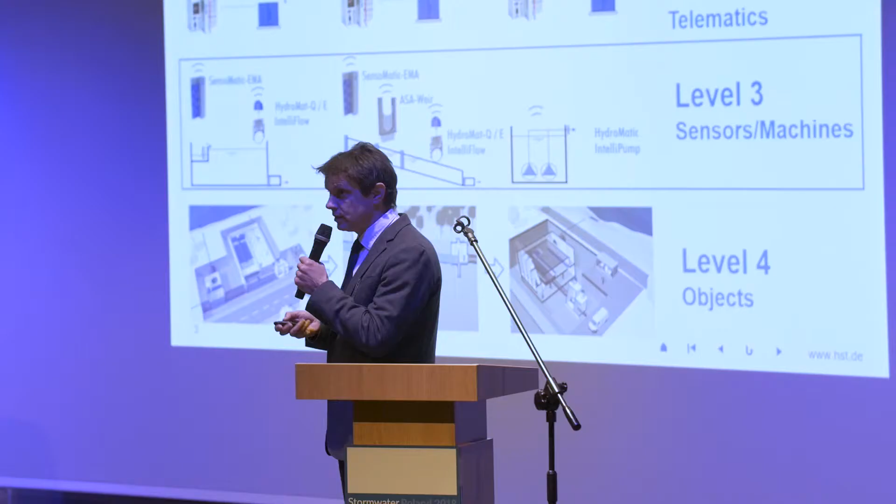The second level is then the local controls and the telematics that transfer the signals coming from these sensors to the higher level management platform, which is the highest level, and this is a combined platform consisting of a rainfall portal, SCADA process control system, operational system, and probably also a simulating software.

When looking at infrastructures, there is one major challenge, which are the peak loads. No infrastructure can be designed for the 100 years rain event or a 50 years rain event. It would be simply not economical. And this is valid for more or less all infrastructures, for traffic, for power, for water supply, and first and foremost also for drainage systems.

So that means the solution is to create storage to accept and to take the peaks, but not only to create the storage, but also to manage the storage in the proper and in the best possible and effective way.

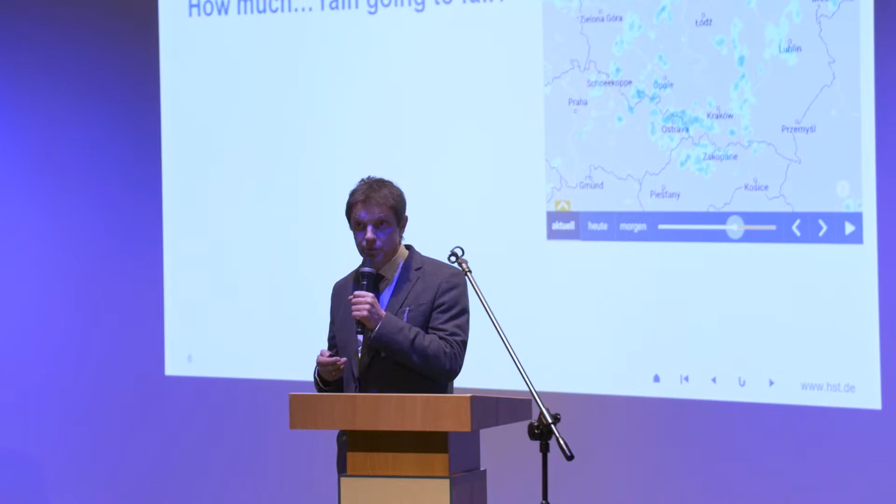Another major incoming system parameter is the precipitation. To know where, when, and how much rain is going to fall is very, very crucial information that can be and has to be used to manage and to organize a system. Therefore, our company developed a precipitation platform.

We call it NiRA.web. Actually, this is a radar-based, high-resolution, precise forecast, also using historical data. It has a resolution of about 1 square kilometer and is updated in a sequence of 10 minutes. So it's a quite precise rainfall forecast. And it is permanently calibrated through ground stations to compare and get the most precise results.

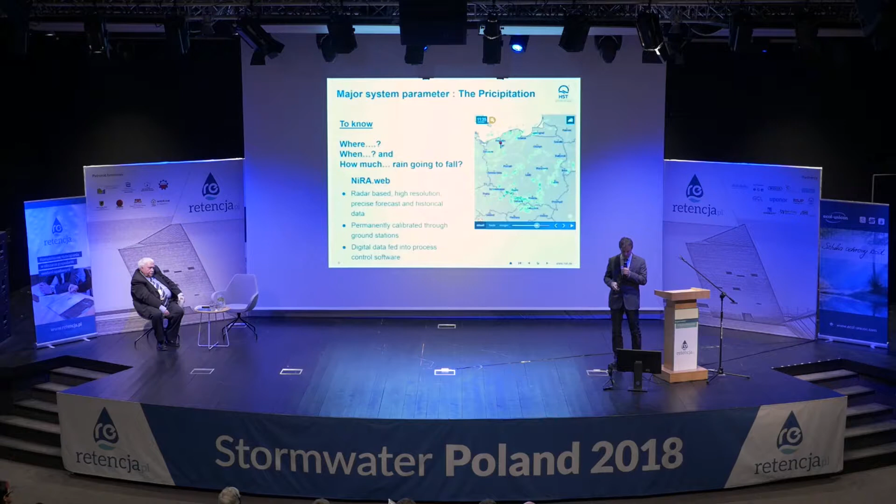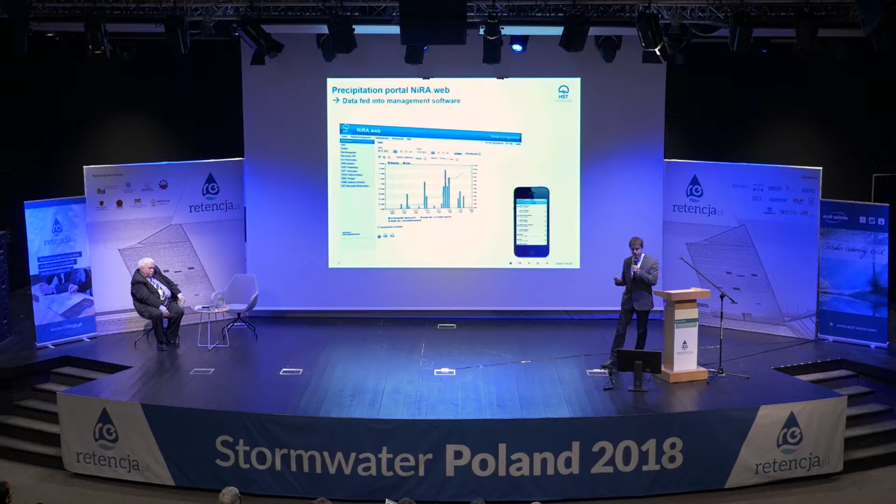This data can be used for planning purposes if there are sufficient historical data available, but we use it mainly to feed this information into the management software to operate the drainage infrastructure, for example, of a complete city.

Now, if you look again at this slide with several levels, the crucial point is the information flow within these levels. The first one is the sensors in the retention tanks, in the channel, in the storage channels, information from the treatment plant and so on are measured by sensors. So the actual status in the complete system is measured or indicated.

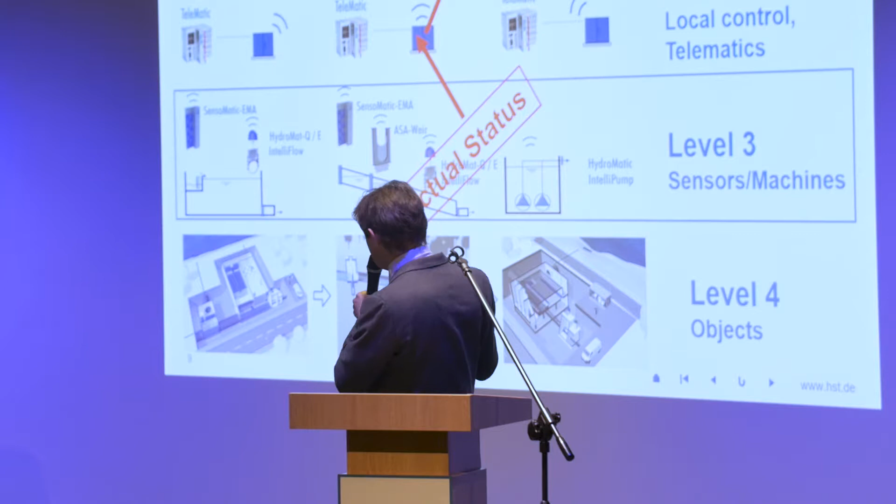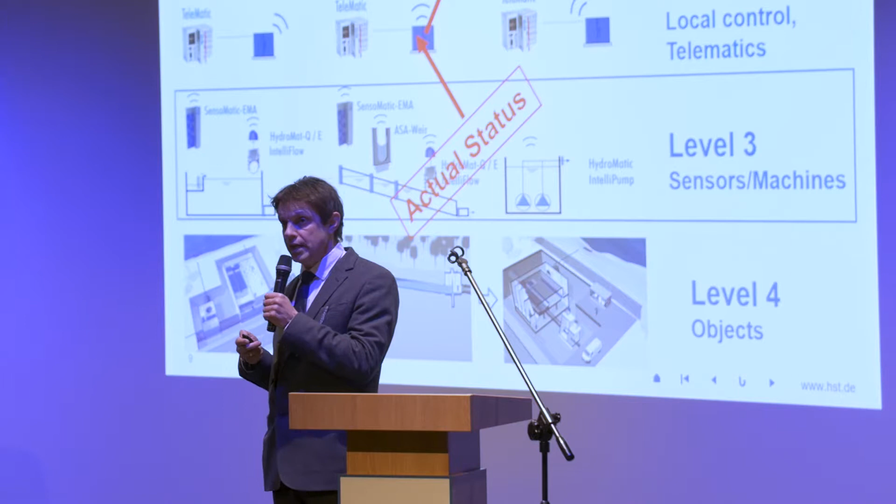And secondly, from outside, the rain forecast, the information coming in through the internet about the rain that is going to come in the next 6, 12, up to maximum 72 hours in advance. So these two informations, actual situation and the forecast, are put together and evaluated in the management software. There is a process control as well as operation control, and it can also be combined via an OPC UA interface with a catchment simulation program.

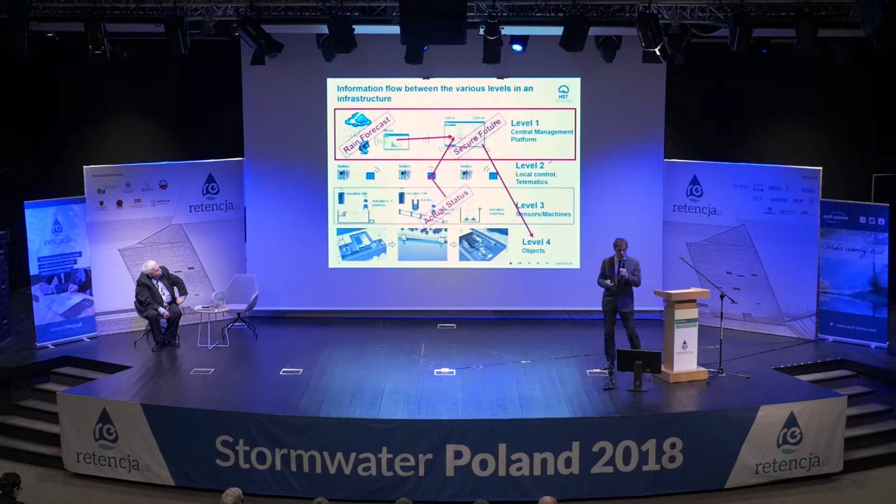And then this information is analyzed to decide what to do and how to control the various objects and the equipment in these objects, opening or closing a gate or a vertical lifting weir or whatsoever. So that is the general flow. That means information exchange among the objects is very crucial and a very big advantage, and that is the new point. Usually, till now, in most of the structures, each object is more or less independently and statically controlled.

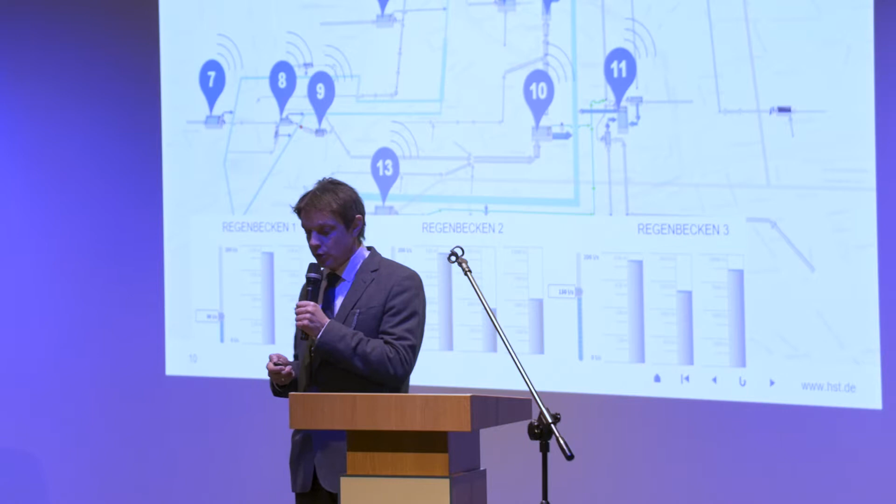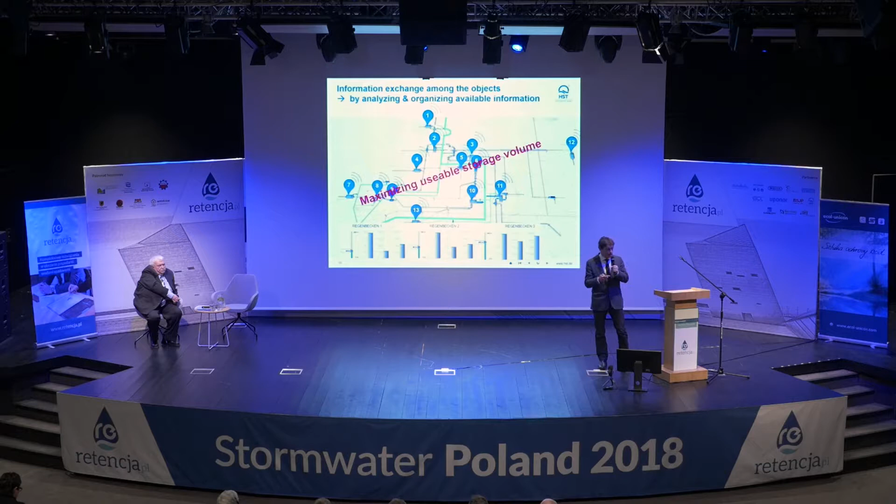But in this system, we call it IntelliNet, all these objects are communicating with each other and exchanging this information. The reason for this is to maximize the usable storage volume in the system, because sometimes in one area of the city the full capacity of storage has been reached, in other areas maybe not. So it is managed to create overflows or flooding only if more or less the entire storage volume has been utilized.

So this is all controlled, monitored, and the drainage network is completely operated in a central management platform where all this information is handled, managed, analyzed and controlled. So the IntelliNet integrates the process control, a SCADA system, an operational management system, KANIO, as well as the rain forecast in the NIRAWeb software, all integrated into one management platform, which is called the IntelliNet. So that is just a very brief description of the management software.

And now I come to the second part, the smart machines that are able to receive and to use these digital signals.

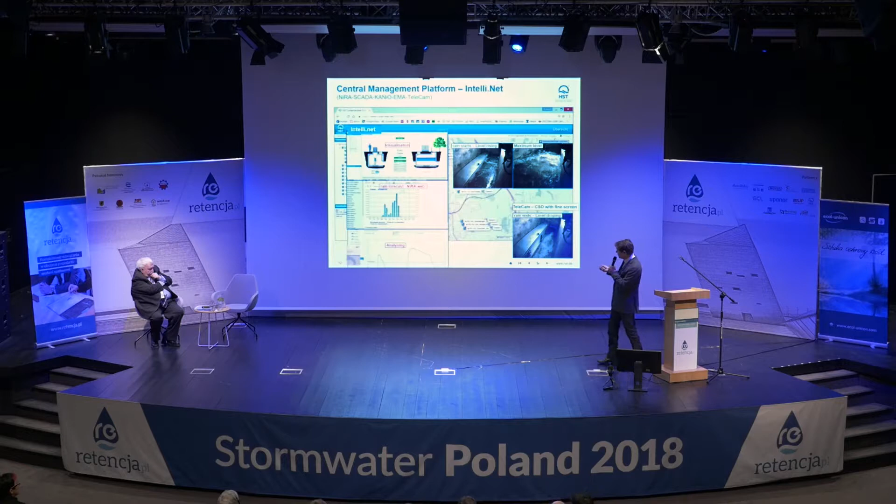Okay, this is one more slide for the management system here. You see the visualization, analyzing, and rain forecast. You can see also visualizing cameras can be installed in the critical overflow points or any other structures. Yes, and here this is a map showing all these different objects.

But now I come to the next point, the intelligent machines. Here, as an example, you see a rainwater retention tank. There's a lot of equipment. It's not just concrete. In earlier days it was just concrete. In Germany, for example, still about 40% of the rainwater retention tanks are just concrete. But now we retrofit this gradually to upgrade it and to reach a higher degree of utilization of the storage volume. So there's a lot of technical machines inside. I just want to pick out 3 or 4.

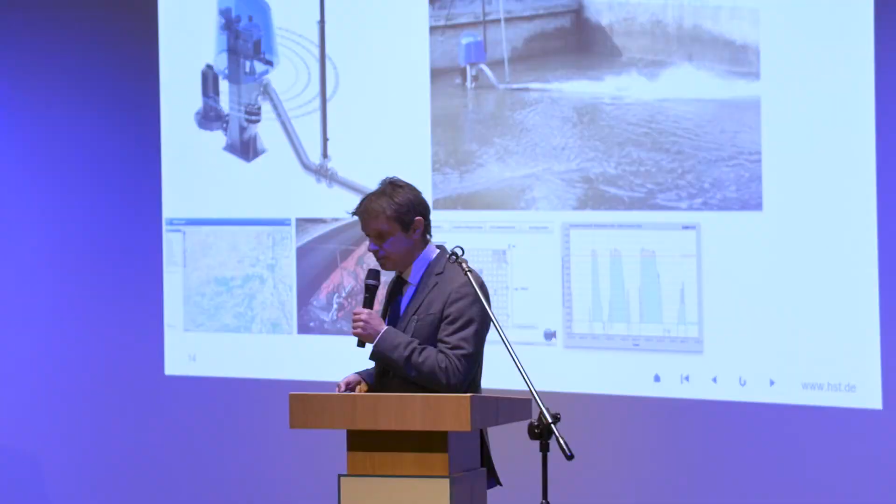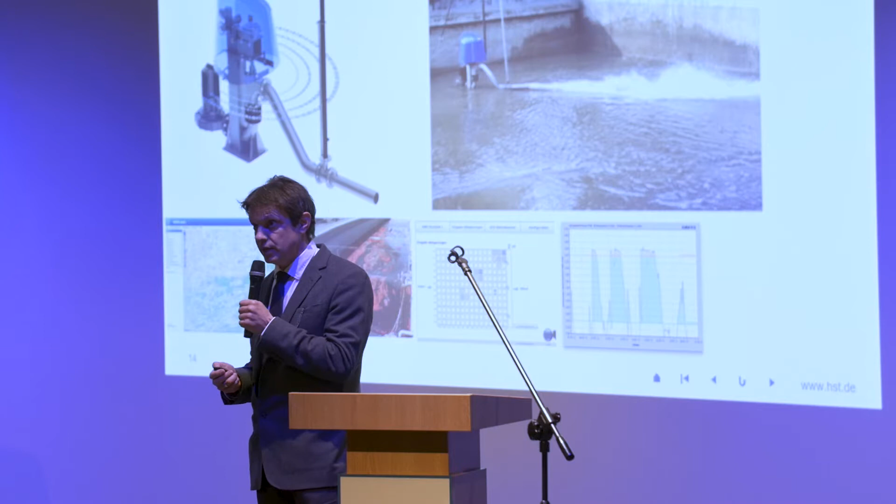The first is a cleaning system to remove the sludge after emptying the tanks, which is quite important because it has quite an impact if these tanks are accumulating sedimentation. So this is a jet cleaner that receives information also from the rain forecast, and they know how much dirt load is going to come into the system, and then they adjust automatically their operating mode to higher or less energy consumption.

Secondly, they are equipped with a camera to indicate the areas where there is residual pollution and sludge, and clean just exactly this part, and they clean until the tank has been completely clean, and then they stop. So it is a so-called result-oriented cleaning system. It starts when it is dirty, and it stops as soon as it is clean.

Secondly, this is an HST, a so-called CSO, combined sewer overflow screen that protects the receiving waters, rivers and lakes from floating matters that are common in combined sewer systems. They usually have a free space of 4 millimeters. Here you see they are installed on concrete edges and protect the emergency overflows.

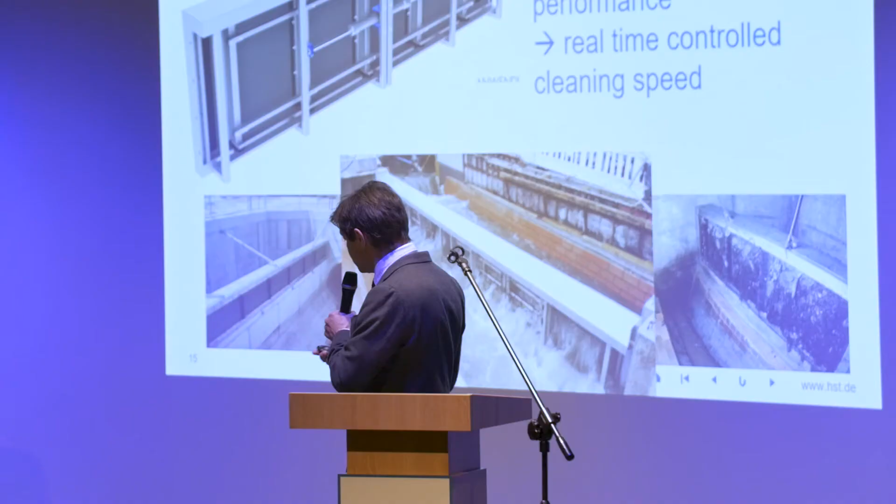And the new development is the cleaning speed. This is a hydraulic cylinder continuously cleaning the bars, and they intentionally create a filter carpet from the solids present in the water, and the cleaning speed is adjusted to maintain a certain filter and increase the filter performance. So that is a significant contribution to retain the solids, and even small cigarette butts or hairs or whatever kind of plastic is retained from polluting the receiving water.

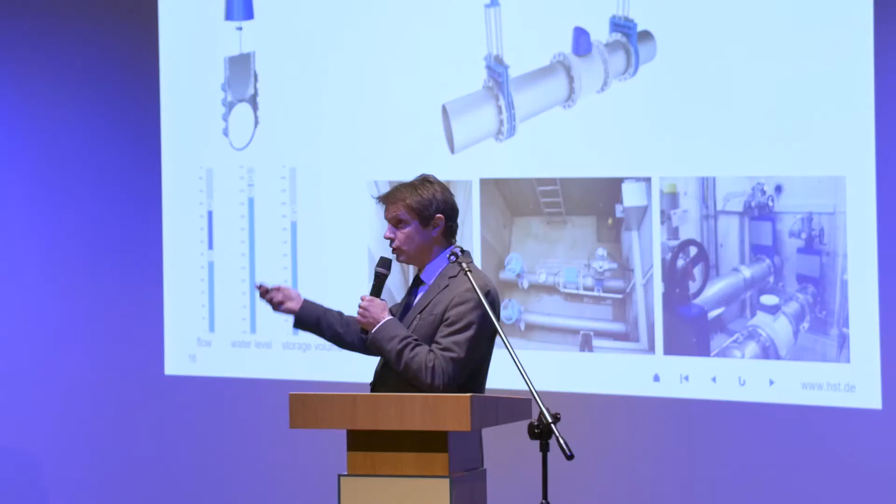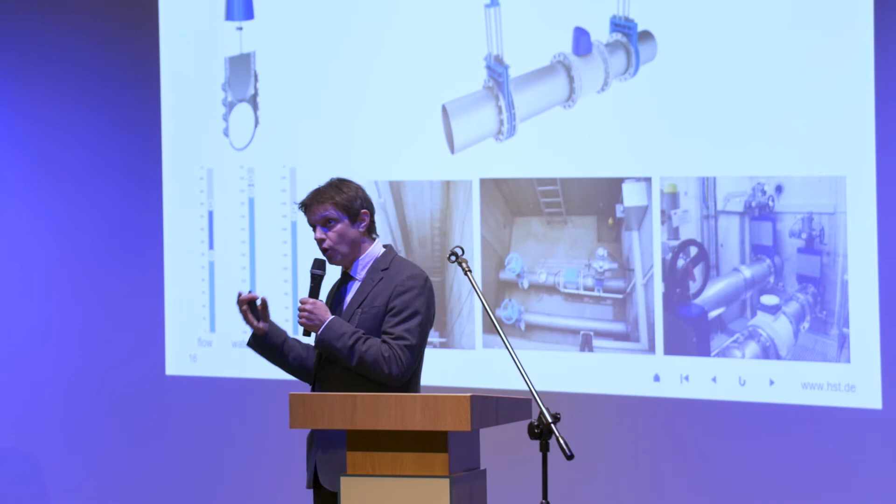So this is a significant improvement compared to conventional flow controllers. They are often just operating in a static way, just by buoyancy control. And the last example of an intelligent machine I would like to introduce is the vertical lifting weir. Here, that is the weir. It is installed in collector channels, for example, to control water levels and flows, but also can create flushing waves in channels to remove sedimentation.

There's a weir plate. The point is that the weir plate moves down into the ground when it is open, so there is no obstacle in the flow path. It is controlled by two level sensors, upstream and downstream, and in this way it can control a preset water level as well as maintain preset flows in the system, and also create flushing. It can utilize and optimize the available storage volume in collector channels.

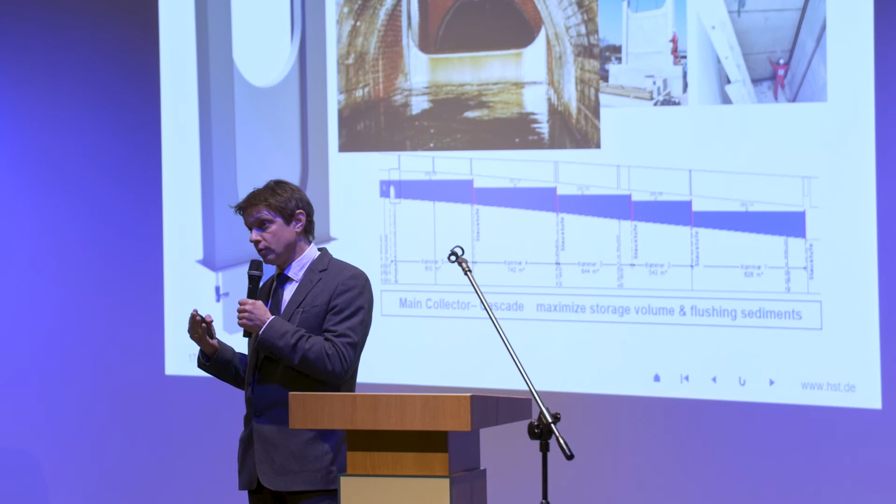So here, just a black and white picture of such a weir installed in a combined sewer system. It's black and white because it's in the dark. And here, a couple of 100 meters downstream, it creates a strong flushing wave to flush all the sediments downstream.

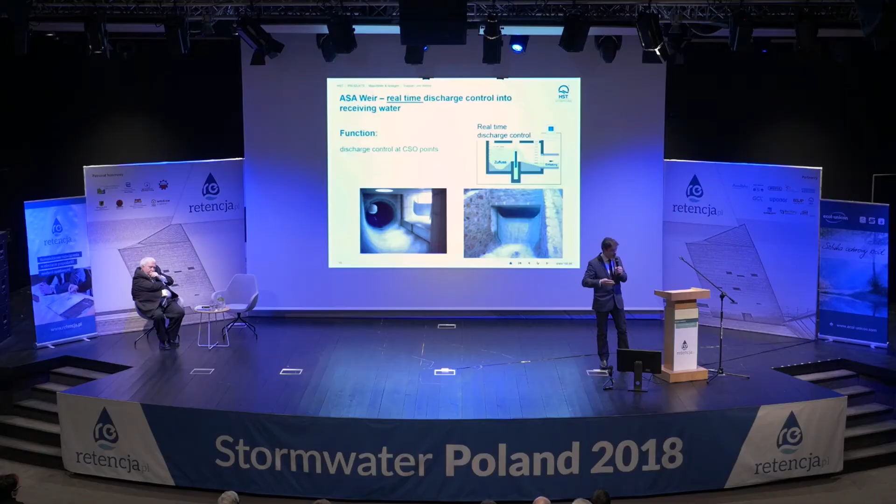It also can be installed as dynamic, real-time outflow controls at CSO points, compared to a static concrete crest. It allows a flexible overflow from the collector channel into the rivers or receiving waters according to the condition in the collector channel, and of course also depending on the water level in the river. So this is a significant improvement compared to these fixed and static outflow points.

So now, why do all this digitalization? What are the objectives? We're doing this, first of all, to increase the operational reliability of the system. In many cases there are changes in the system from the design parameters. If we use digital and smart machines, we can compensate failures or differences made during the planning phases. So we can optimize the flow and the operation afterwards, so a higher reliability.

Secondly, to increase safety and security of the assets and also the humans. And finally, securing the investment and the return on investment, of course, because it's the taxpayers' money. So to summarize, it leverages the value for society in terms of cost and environmental protection.